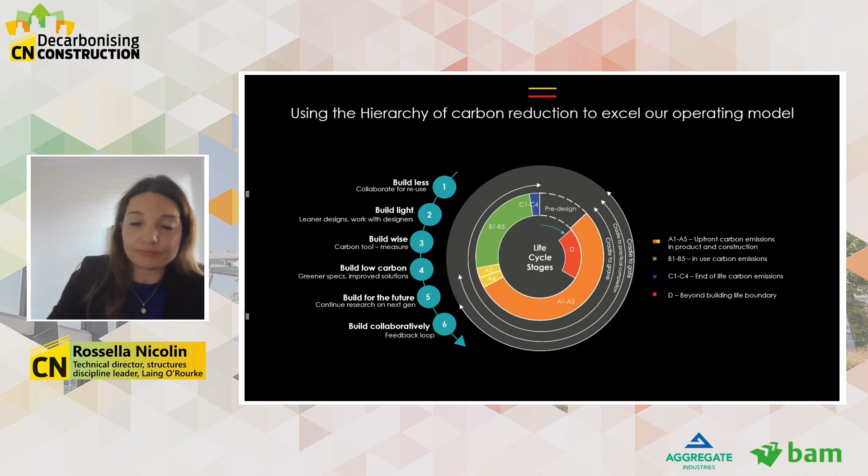So in practical terms, Laing O'Rourke has really tackled embodied carbon as a key performance indicator, and then we adopted the measure, reduce, minimize, and eliminate approach. Of course, we cannot be net zero tomorrow or next year. It is a long journey ahead of us, but it's important that the bases are actually put down to make sure that we can actually track the improvement and highlight the key areas of development.

So our project engineers and our team, as we approach a project, really we are adopting a hierarchy of carbon reduction, working with potential clients and partners and adopting this technical responsible design framework. First of all, very importantly, we have mandated embodied carbon assessment of all projects starting from tenders. In the last 18 months, this has been mandated in particular in work winning activity and pre-construction, focusing initially on the upfront embodied carbon of structure and substructure components.

This has been expanded into considering more projects throughout their life cycle, including projects on site, so in the live project phase, and also we are expanding the remit not to consider just structure and substructure. And quite importantly, I'll touch upon it as I talk about the tool in particular, that has been framed within the particular remit of industry standard. So in terms of the upfront embodied carbon, I'm referring in particular to the carbon emissions associated with the construction of the building, so up to the point of practical completion.

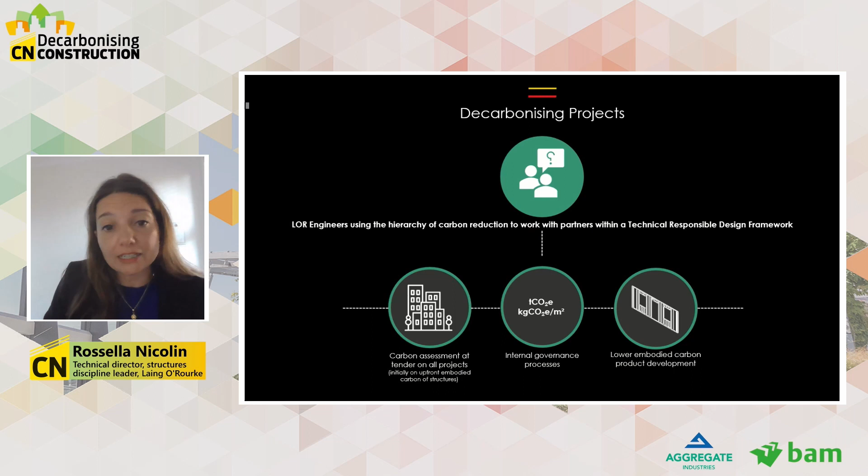Quite importantly, also governance processes are something that we have implemented as a way to track, measure, and compare projects across different typologies and different sectors. And all the figures are tracked in a central database and are important as we build our journey towards net zero. And also, it helps the development of lower carbon products, how we can work with the supply chain and consultant partners and clients really to deploy the next generation of projects and technology.

So, what does it mean in real practical terms? I'm sure you're all familiar with carbon calculators and tools that are widely available on the market. So internally, we are using these tools as well, but the importance of what we developed in terms of the LOR carbon calculator is the real time effectiveness of decision making and optioneering, using the power of digital tools for collaborative decisions. That is something that I really want to emphasize again and again, because as a contractor and definitely as an actor in the industry, it's really important.

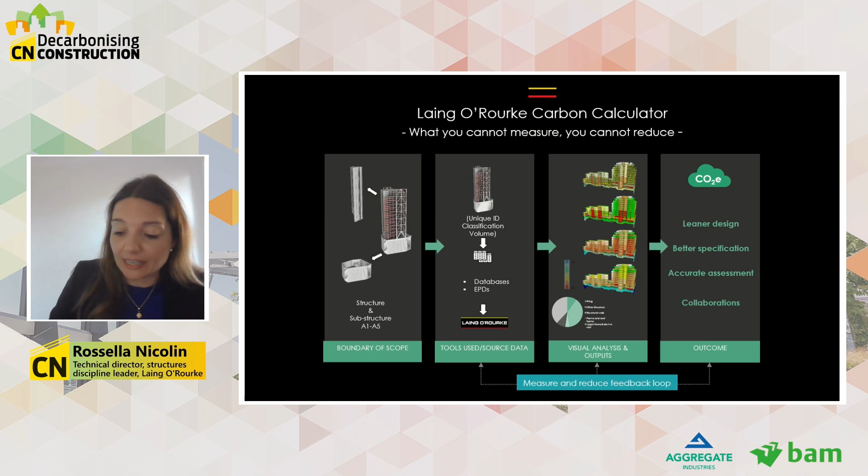And again, this focuses on the critical thinking that can be really enabled. So that real-time decision making, coupled with the critical thinking of all the team, particularly the project engineers and the technical leaders, can think about different options: volume reduction, better specification, and also enabling circular economy principles if there is any possibility of reusing components.

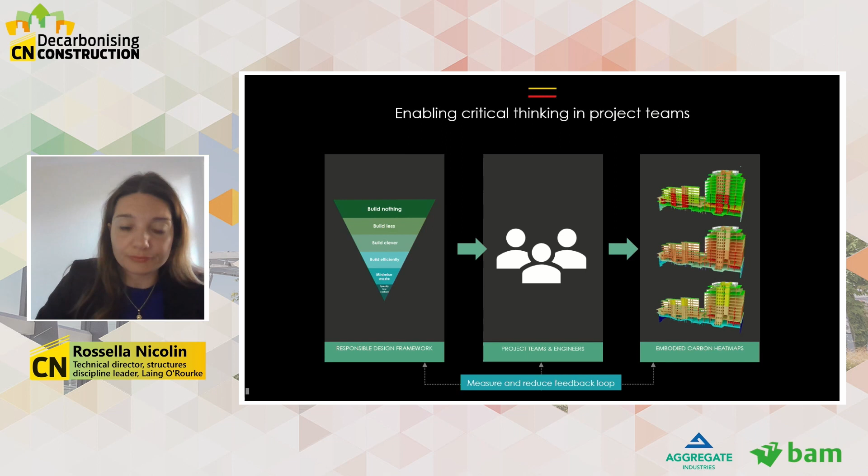And that really allows fast optioneering, even in the course of a design team meeting with other parties, where different options can really be addressed. And the same thing can be said in terms of supply chain engagement.

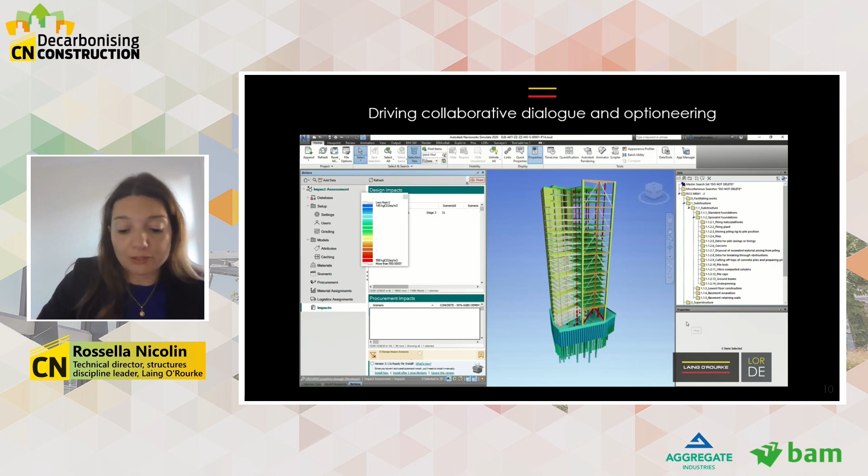So what does it mean in terms of case studies? I've been talking about the context, and about the underlying philosophy of really enabling critical thinking and how we can think differently. How has Laing O'Rourke been using this particular tool and this approach in the last 12 to 18 months? I have a few case studies, both in work winning, pre-construction, and also in the live project phase. Different phases of a project might have different requirements or focus, but the importance of driving discussion and having a fundamental KPI doesn't change.

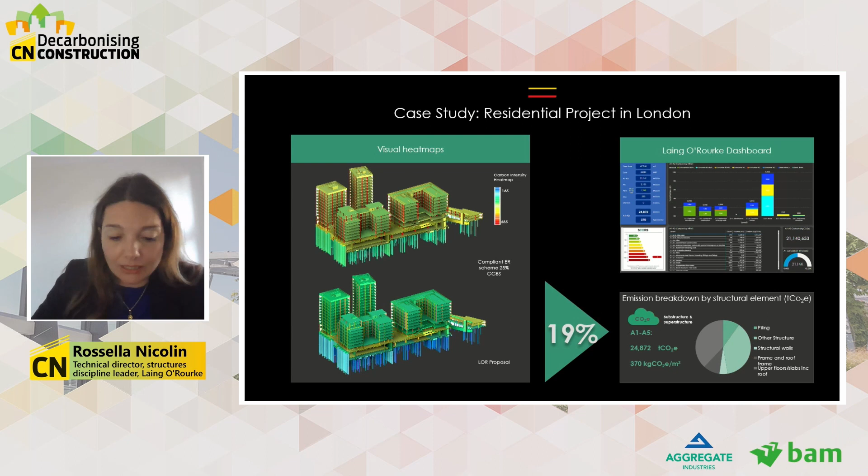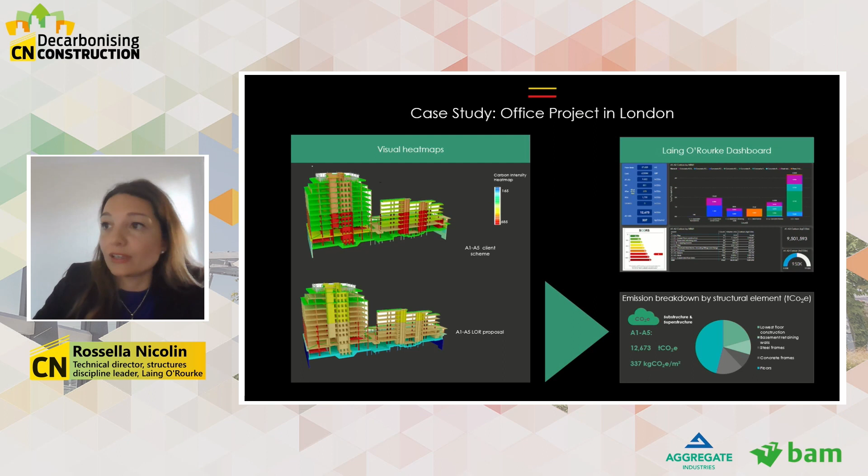This is another office project in London where, particularly, the inclusion of modern methods of construction and the DfMA components drove the embodied carbon down just a little less, again, the 10%. This was important because different options were addressed, particularly in light of different KPIs, cost and program, and a compromise at the end was achieved in discussion with the project team, with the clients, with the external design partners.

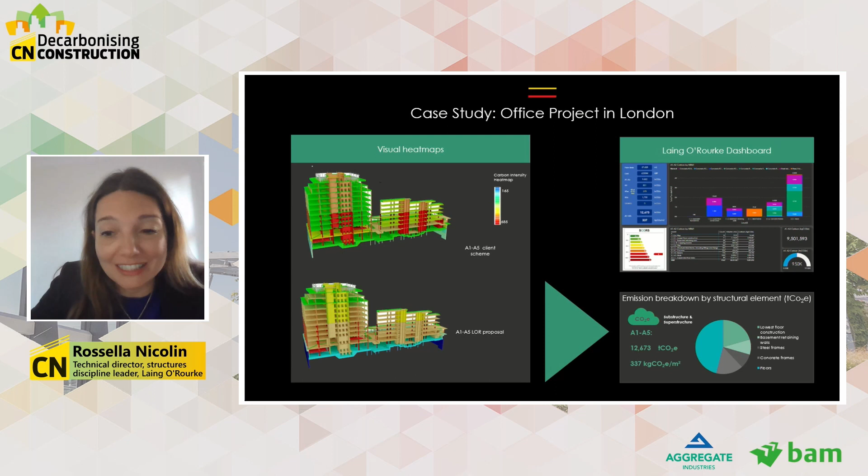And different solutions have been driving in terms of, particularly, the substructure and the core wall system. You can have this discussion quite easily, as I say, if you see areas of red. There's nothing like a piece of red on a screen to drive a positive discussion.

This is another more recent example where, discussing a work-winning opportunity with a client, we have been asked to come up with different alternatives in terms of constructability of a transfer structure. We were lucky that it was very early in the design process, and having that constructability input was really helpful for this particular area of the project, driving down the embodied carbon by about 27%. So as I say, it's not just about the specification.

This conversation about reducing embodied carbon for contractors shouldn't really be about how much GGBS you can put in, also because GGBS is a finite resource, but it's really about: can you reduce the volume? Can you build it differently? Can you deploy systems that make it safer and more sustainable? And then at the end, can you have a leaner, greener material specification? So all these are good discussions, and they can happen as and when contractor, designer, client and supply chain get involved.

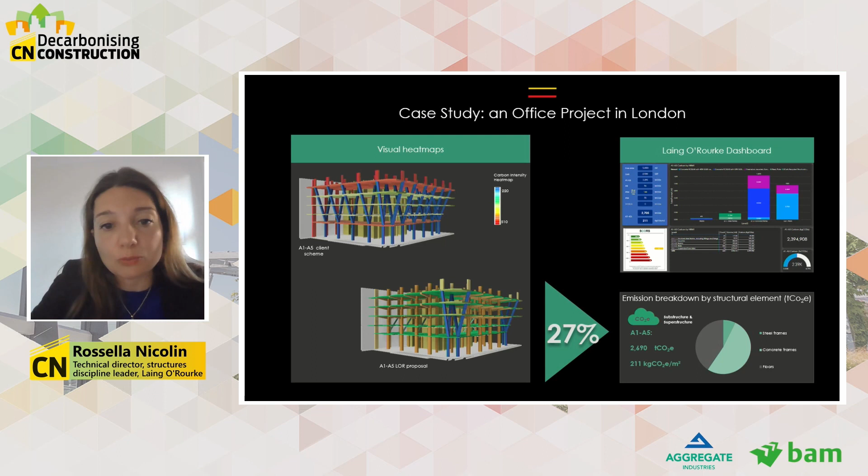Last, this is a different example. This is a case study of a stadium we're currently building in the UK. The slide has no name, but I'm pretty sure that you can all guess what stadium it is. At this stage it's different because we started doing embodied carbon calculations only once the project was actually started on site. So in this case, whilst a lot of the design decisions have been made, I think it's important to still have this model to drive decision making in terms of supply chain engagement, monitoring in particular, and to track how the value can change at different milestones during the construction process.

Also, it's quite important in terms of construction data, and I'm talking in particular about the A5 phase in the embodied carbon life cycle in the RICS framework, how having more projects that actually track the data in a live phase can really help the exchange of data in the industry. So we, as a company, will start measuring projects more and more in that live phase, regardless of what happened earlier in the design, and that applies across the board in buildings and infrastructure, to have that monitoring mechanism, but also that data collection that will help us all in the industry moving forward.

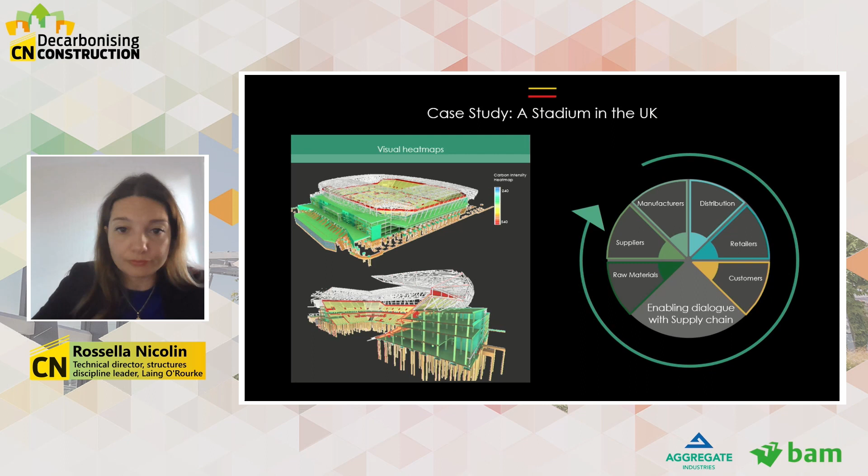The last case study I would like to show is around some product developments that have been particularly informative in terms of embodied carbon. As you might know, Laing O'Rourke has direct delivery, but also an integrated supply chain. So the company owns a factory in the north making precast components, and as such, we are in the privileged position of being able to test different prototypes. So you can see here our D-frame system, based on a series of inverted T-beams supporting a rib slab in U shapes.

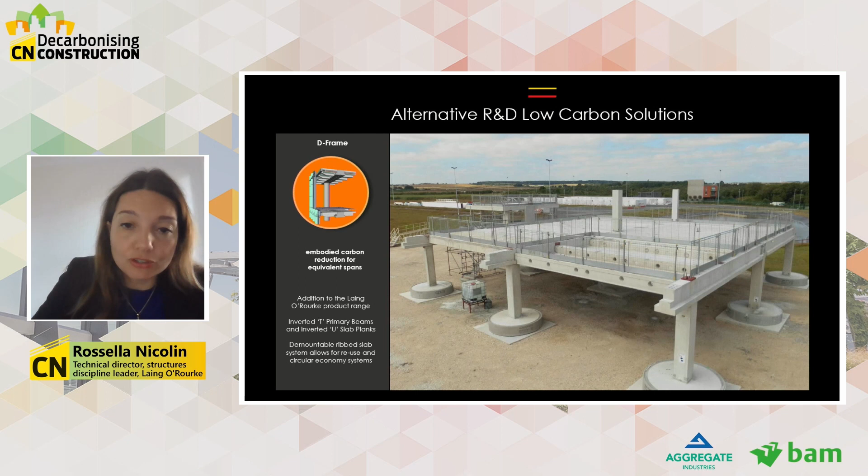This has been tested and prototyped, as you can see in the picture, and we are recently assessing different opportunities in terms of what different products, even something outside the box like a rib system in an office space, could really do. So really quickly, as I'm conscious of time, the system has been assessed against a standard baseline PT scheme, for a total of 275 millimeter depth, and you can see the total embodied carbon of that particular floor plate was just short of 200 kilograms of CO2 per square meter.

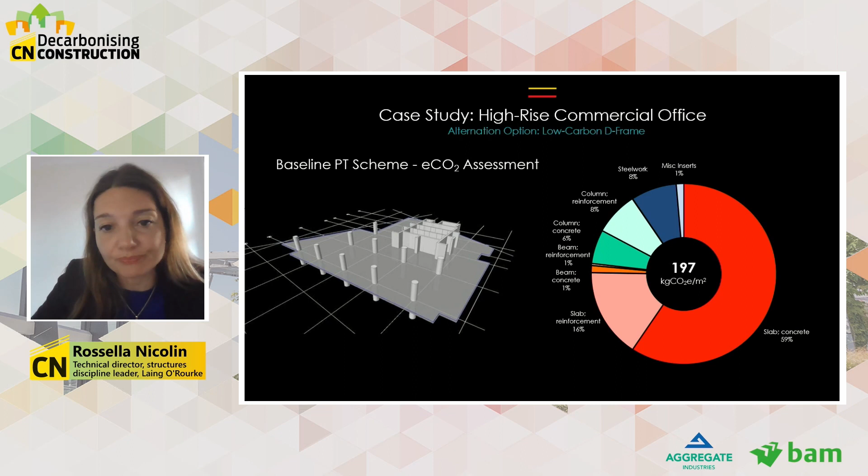And then using a rib system, even pushing the boundaries of low carbon concrete, we could reduce quite a substantial amount. I think the message here is again that collaborative dialogue, using embodied carbon as a KPI in a real-time approach, can really drive that optioneering and lead to collaborative solutions.

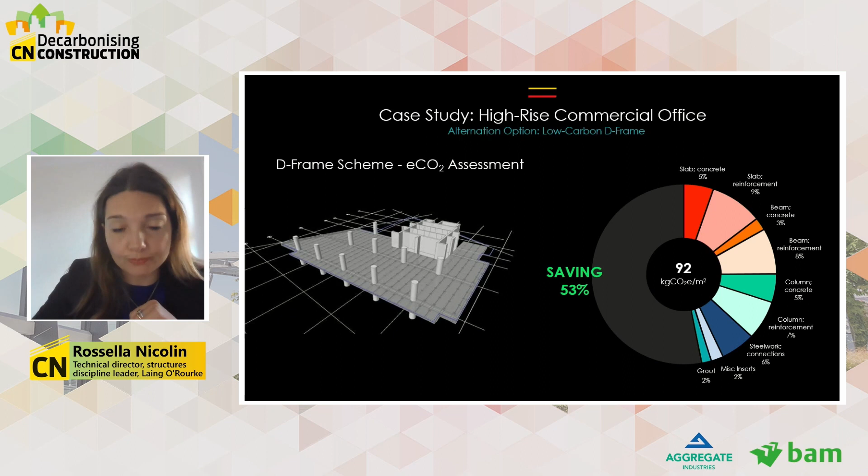And I'm concluding now, and I just would like to share quite an important message. You've been hearing about the carbon calculator, how we've been addressing it, but I can tell you what the tool has done to our operating model. It has enabled critical thinking; most of all, it has enabled the discussion about having sustainability and carbon as a key performance indicator in the project.

And it also started a discussion about the power of digital tools to harness data towards responsible decision making. It has enabled conversation and solutions development with client and designers so that really we can draw on joint expertise and discussion on volume reduction, constructability, material specification, and then even importantly, drive future discussion, actually present and future discussion

on circular economy, particularly as we embark as a company more in reuse and refurbishment opportunities, as well as drive enhancement and quite important conversation with our supply chain. And the more we do that across the board with different levels of stakeholders, the more data we can harness to establish benchmarks and really move towards a journey to net zero together as an industry.